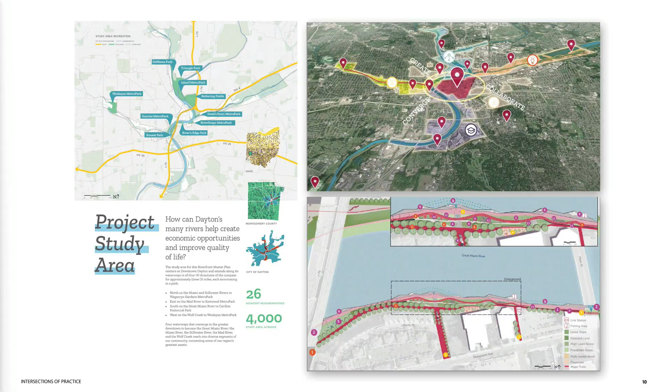The first part of pretty much any process is advocating for public input. Once you've done the analysis and feel good about your homework, it's important to bring this to the public and go where people are. People aren't in town halls—some are, but not everybody. Parks and markets are where people are, and the internet is where people are. If you want to represent the community in your designs, you need to visit them in their space and avoid governmental spaces when possible.

So we went to the community with our plans on a weekend in a park during a concert series, stemming off existing participation instead of relying on our own advertisement. Out of that public engagement period, we had about 3,000 website visits and even more entries about where people work, study, and live. Being able to map that granular data and crowdsource your site inventory and analysis is a huge benefit.

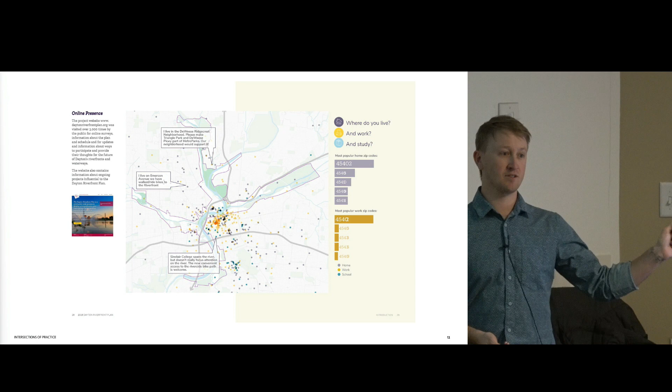That was another great part of Sasaki, and something to look out for in firms: do they have an R&D department? What are they doing to advance the technologies that allow us to convey ideas? We were fortunate to have an amazing team of programmers designing custom websites for user interface and input, plus custom add-ons for our programs that made our jobs easier. Design is a collaborative effort, and we don't have to carry the whole load ourselves.

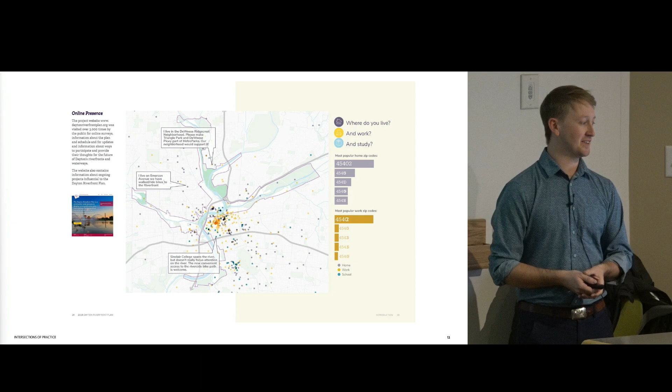After that website visit, we had to look at how to take all that information and synthesize it into something the public can initially react to. One of the ways we did this was through a neighborhood placemaking day-in-the-life exercise.

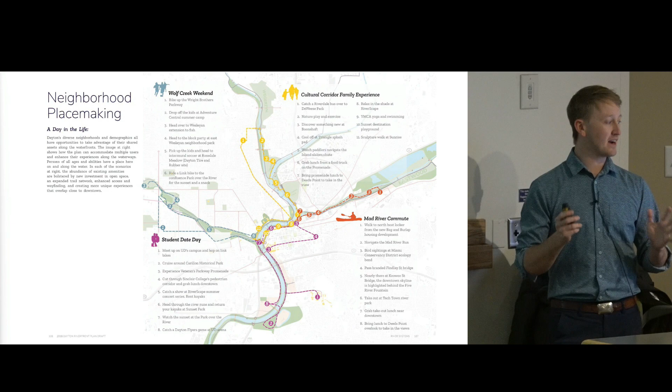We took our four study area corridors and created day-in-the-life scenarios for what you might do within each corridor, looking at the main connection points people hit. There was the Wolf Creek weekend, the Wright Brothers Parkway area, the cultural corridor and family experience, how you get to neighborhood resources like the YMCA, nature play in parks, and sunset at a destination park along the strip.

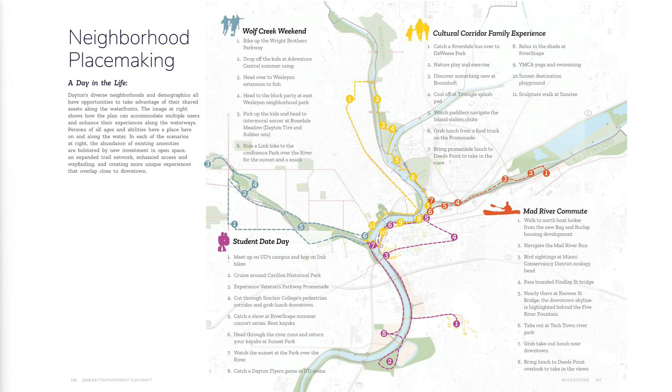My favorite was the Mad River Commute—Dayton has a series of whitewater features downtown, and on our client team was an ex-Olympian slalom kayaker, which I didn't know was a thing. Her multimodal means of transport to work every day was to paddle down that river to their main office in downtown Dayton.

I hope this represents the fact that it's our job to guide clients and the public toward the answers they want, not just for them to provide information for us to synthesize or spit back at them. It's a back-and-forth relationship, and you need to look at the best tools for that particular client and situation to help that relationship flourish.

Diving a little deeper into where I was more comfortable was the park design section. We had 10 different metro parks as part of this study. How did we take the moments we discovered throughout the inventory analysis process and turn them into executable plans? Looking at this as a whole big picture allows us to address funding, maintenance, amenities, equitable access to different communities, and regulatory concerns.

I did these two projects because they also had Army Corps of Engineer involvement—a ton of levees—and we needed to manage expectations when connecting to the river in terms of what a site looks like that still has that flood protection function but is more engaging for the community to access.

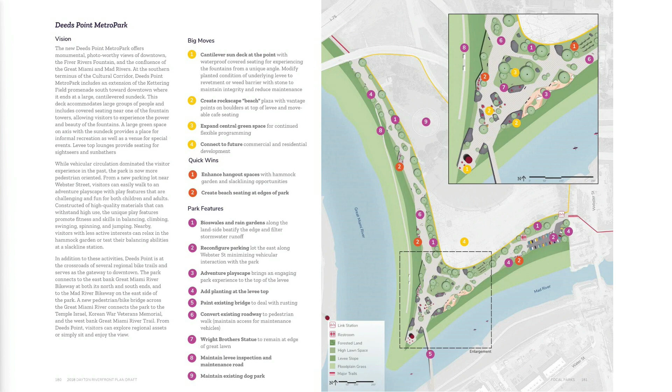That kind of breakdown also helps you when it comes to value engineering, which is an inevitable part of most projects. You're going to have elements that get cut, and having those elements able to scale with your project, both materiality-wise and in size and implementation, can help you keep your design intent through that gruesome process.

I also want to touch on this plan, this beautiful plan, because Lon is just a pro when it comes to hand graphics. I was talking to Dave a little bit about this earlier, that it'll serve you throughout your career. It's kind of a weak point for me. I remember Dave walking through and seeing my empty desk in the studio with a few monitors and saying, 'Man, you live in a digital world, huh?' I've taken that to heart because that's an easy trap to fall into, the cleanliness of the digital world. But design is messy. Don't forget that. You're going to have better products if you remain loose throughout that process.

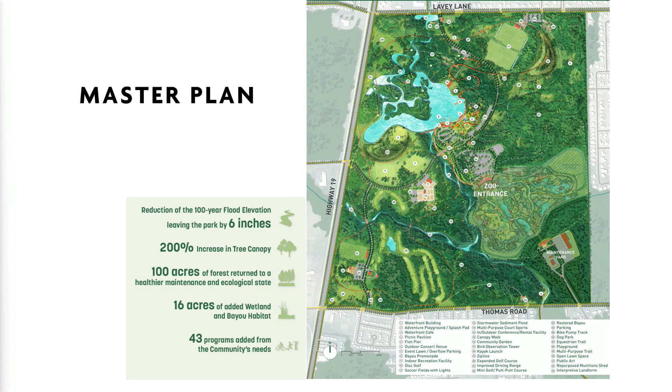So we have to look beyond our borders. Are we being good stewards of the land that we're impacting past our project site? This meander was introduced into a channelized, really eroded-out stream bed throughout this process, which was able to capture more of that runoff, as well as some dredging of the pond and other BMP features throughout the site.

So when you're dealing with something as large as a 660-acre park, you also have to break it down into those bite-sized pieces. We worked with the community on which of those pieces needed to happen first, and it's currently being executed.

I want to dive a little more in detail from that large-scale plan. A large part of what I do is construction documents, translating those ideas into physical plans and how it gets constructed. A lot of the time, we have a lot to learn from those construction professionals. So how do we bridge that gap as well?

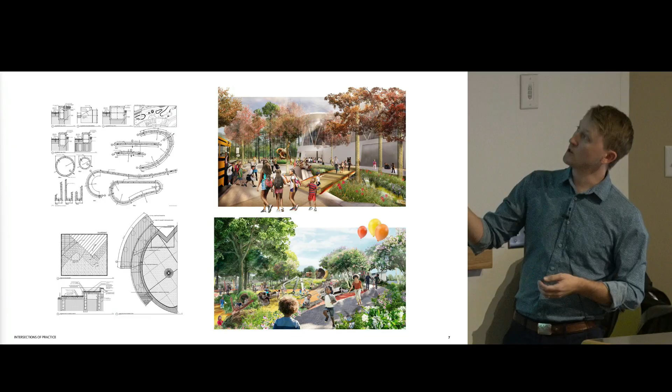One of my main areas of focus was this entry plaza for the new zoo entry building. It was this really whimsical space that had integrated different biomes throughout it—longleaf pine forest on the west side and a bayou cypress forest on the east. There were some tricky design solutions, like not integrating handrails along the bridge for code. We had to work with our civil engineers to make sure water kept flowing through the system while reducing the fall height to 3 feet. It's the little things that make your big ideas possible.

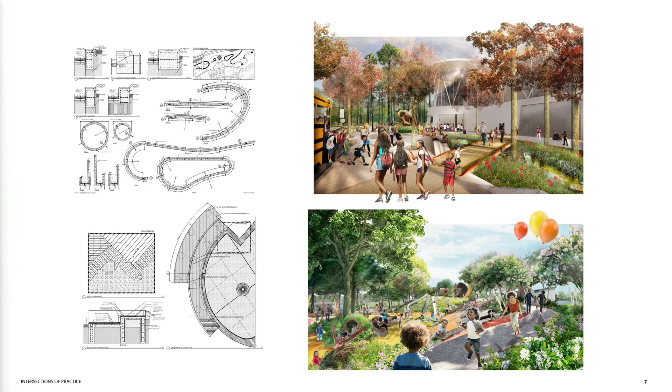I also want to touch on these graphics, because a lot of the time, especially if we're rushed, we're just grabbing entourage from wherever, but representation in your graphics matters. If you're not representing the community you're building for in those drawings and they don't see themselves in those spaces, it's a big problem.

Since this mature tree canopy makes the park vibrant, we designed backwards. We went with an arborist, identified all the trees we wanted to keep, and designed the parking lot around that. It ended up being a larger area, but a more conservative approach to impacting the landscape.

Following through on that is critical. A lot of the time our construction professionals will put up fences around those trees initially, but if you're not paying attention they'll fall over, or they'll have backhoes or heavy equipment compacting that soil. Following your work all the way through construction is really important, especially with irreplaceable features like mature tree canopies, so it's not a disappointment to yourself and your client.

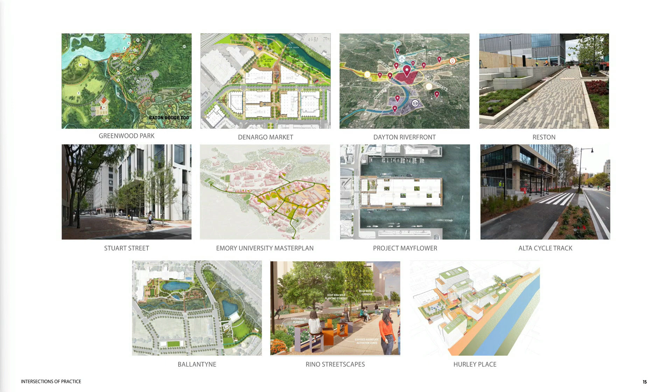Before I move on to the Army Corps piece, I want to touch on the importance of tracking what you work on throughout your career. Things will blend together as you build a large portfolio, and you'll forget lessons learned unless you actively document what you've done. This shows most of my projects at Sasaki—it's a nice personal touchpoint on how your career is going, whether it's what you envisioned, and where your design blind spots might be.

Switching to a pretty different world—2.5 years ago I moved from Boston to Omaha, Nebraska to start a job with the Army Corps of Engineers out of their Omaha District office. We'll focus on two ends of the spectrum there: the Lower Brule Sioux Reservation and a barracks project for Fort Carson, Colorado.

First, I want to touch on the Army Corps of Engineers. Going into it, I didn't know much about it, so a quick overview: the Army Corps is one of the largest design firms in the world, with 37,000 employees, but less than 300 are landscape architects, and even fewer are practicing. Most are planners, project managers, or regulatory folks. Getting more landscape architects in there, with that diverse opinion to meld with engineering solutions, has been really critical.

Omaha District is also the largest geographic area the Corps represents, so we have our own plane to fly us around to these remote areas. I never thought I'd have my first time in a private jet working for the federal government, but that's how it's worked out.

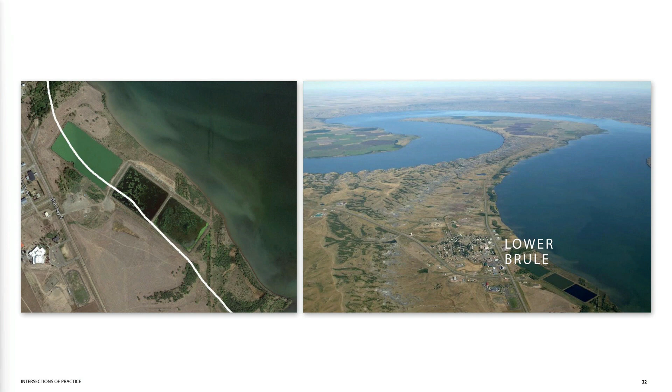So an unintended consequence of building a dam along with flooding that valley is also that you're creating a static water level. So as that water continuously laps against the same piece of shoreline, the erosion rate is just off the charts. Especially somewhere real cold like South Dakota, you have ice shove events in the winter that really just claw away that land.

So 450 acres of land are expected to be lost if we didn't take any action within the next 50 years or so. You can see some of their recreation elements, in a relatively short period of time, disappearing into that area. And the federal government really is not in the business of handing out new sovereign land, so the lost land is a permanent kind of scar on the tribe's landscape.

This was what the landscape originally looked like. They had this very culturally important Brule Island, and you can see how that disappeared in these two comparable aerial images. It's roughly here at the bottom of Lake Sharpe now.

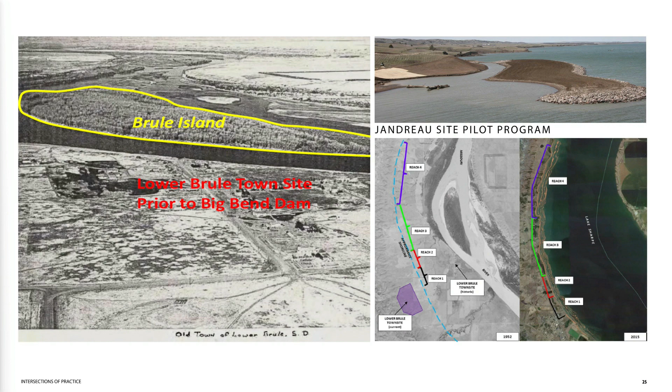These are our project reaches, 4 reaches as part of this project. There have already been some efforts upstream at the Jandreau site, a pilot program for generating new islands in this area that can have some culturally significant plantings. This is now pretty heavily vegetated, a great case study. A lot of the indicator species that guided the forming of that have been starting to show up in that area, so there is some progress.

This also serves as a breakwater to keep that shoreline intact. This is the first executed part of this plan, the Wada-Nazin boat recreation area essentially. That first aerial image was of this zone, which has a beach, other recreation elements, and this walking trail that goes along that armored revetment. It also forms a wetland zone, and a benched terraced planting zone to introduce more of the historic cottonwoods and willows throughout this region that no longer exist along that shoreline.

But you learn from your designs. We learned that zebra mussels, an invasive species here, clog things up. They will fully fill in our culverts in a single season, as well as some sediment, since these are flat bottom culverts with no water pressure to flush those out. So there are lessons learned for our future reaches in getting these wetland systems to function more smoothly.

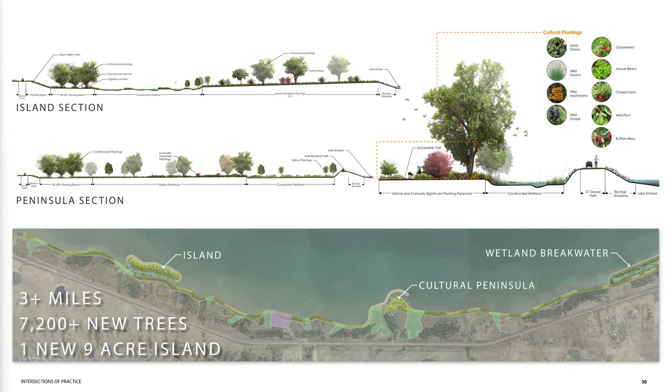I'll end this section saying passive destruction of property is still a form of imperialism. So we really need to give agency back to tribes as we move through these projects.

Speaking of imperialism, we're transitioning to the UEPH barracks project. UEPH, I even have to read it, stands for unaccompanied enlisted personnel housing. It's kind of a fire hose of acronyms in the Army Corps of Engineers, you'll find. This project is a 46-acre compound that will be built out for 1,800 beds.

An interesting fact is that bases have square footage maximums, and Fort Carson's has been maxed out for a number of years, so anything they build, something old has to come down. Efficiency is really important, as is the real estate for that.

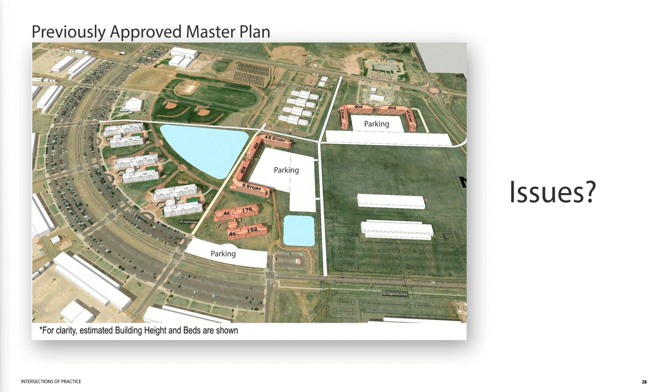Yep, those are all good answers. So essentially that's it. Connectivity, there's no additional stormwater management through here, it's just the existing basins. There's no recreation space, trail connections, other connections to work and eating establishments, things like that. And there's no relation to the site or the other buildings or thought to the existing topography. And it's using a pretty old school approach of hugging that parking and embracing that instead of making that a space for people and not vehicles that are built into that.

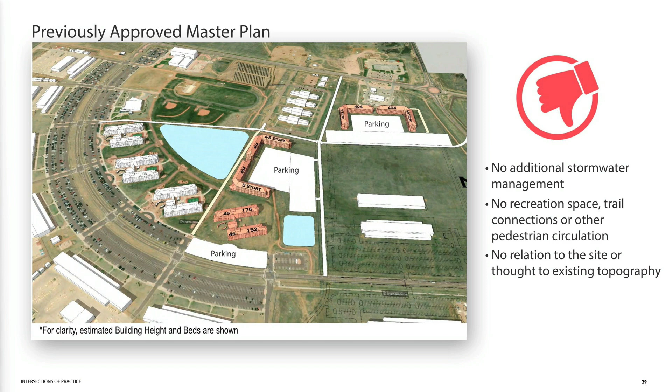And the orientation is also just not that great for solar exposure and things like that. So we got this plan. They said, hey, pick one of these 8 buildings essentially, and that's what you're going to be designing. We said, hold up, we don't want to build any of these. Can we essentially redesign this? And they said, yes, but your funding expires next week.

So in 3 days, me and the architect came up with a couple configurations that tried to more embrace that stormwater management piece of this, creating spaces for unaccompanied personnel living in these spaces. And we provided a couple options that we'd be comfortable with.

So always provide options and always couch them in terms of what you prefer. The client always has a way of selecting the one that you liked the least. So never present a plan that you're not able to defend and that you wouldn't be comfortable moving forward with.

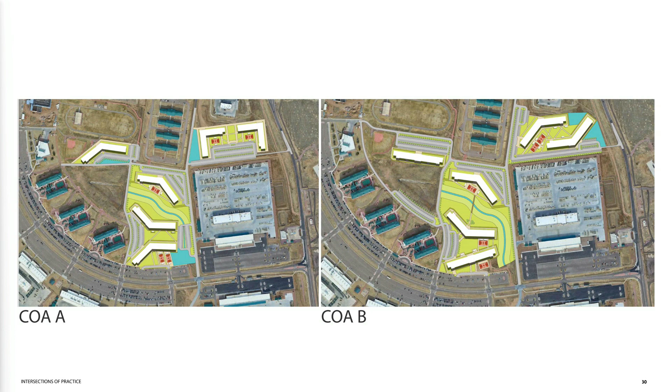So yeah, along with incorporating stormwater into this, we really focused on the buildings all having a relationship with one another. And the southern site was selected as our first project. They signed off on kind of this new general orientation that is still kind of changing and shifting just because of some of the square footage requirements that we only have so much leeway with. But just quick and dirty, this is our 2-day plan for what that preferred concept was.

In that original master plan, it was a 1-to-1 parking ratio. So you got 1,800 people living there, you got 1,800 parking spaces. We were able to get the base to agree to a 0.7 ratio, and there's actually an existing parking lot here, so it allowed us to actually remove an entire bay, several hundred parking spaces, to increase our stormwater detention area, which is also an interesting challenge on this because places with airfields don't like birds.

It's called bird aircraft strike hazard, and so we essentially have to design pleasant spaces that function well, but aren't the most friendly to species actually taking up permanent residence there. So that's been kind of a tricky balance to fill, but I'll let you know how this one advances.

So even more than our civil works project, which from a landscape architect perspective are more enjoyable generally, landscape architects on military projects I feel like are really important. They cut down on the export of these sort of cookie cutter hellscapes across our global reach.

So the second piece of this presentation, work-life balance. LaVal Morris, founder of the USU program here, LAEP program, had a great quote as he was retiring. He said, 'Perhaps I have become impatient in the endeavor to save the students from swilling in the complacency of mediocrity.' I think we all kind of need to keep an eye on that.

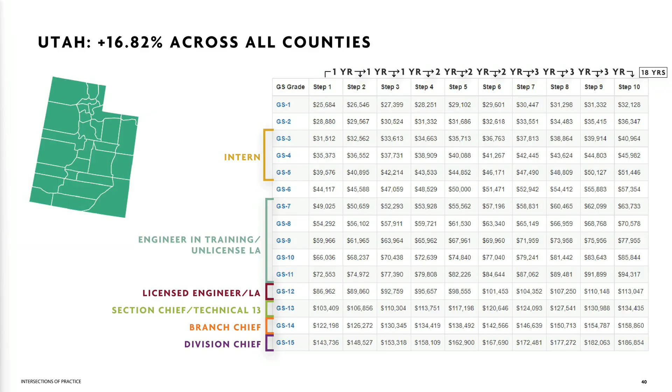Unfortunately, Utah is on the lowest end of the adjusted income across the entire United States. They're at 16.82 adjusted locality pay, whereas California, for example, is at 45% on top of your base pay, and the national average is around 21%. So pay attention to those items as well if you're pursuing a job in federal government.

Looking into advancement within my actual organization in Omaha District, first of all we are led by a colonel, but the vast majority of our people are just civilians, not enlisted. We're not obligated to any sort of service or anything like that. I am under the engineering division's design branch in the civil and environmental section.

From there it breaks down into that GS scale. Our interns are around 3 to 5, an engineer or landscape architect in training is that 7, 9, 11 path. A GS 12 is after you get your license, so that's where I came in because I did have that licensure in hand when I was coming to the Corps.

GS 13 is kind of the chief of those sections, or a technical 13, which is a pretty unique role to the Corps. If you're looking at other agencies like NPS or Fish and Wildlife, most 13s have regional responsibility, either guiding a whole district or having management responsibilities for 60-plus person teams. The Corps has 13s that really focus mostly on design and leading smaller scale design teams.

So we have 3 technical 13s in our section, myself, one of our civil engineers, and an environmental engineer, which allows a lot of freedom to explore some of those research options and further my technical knowledge while still developing leadership skills.